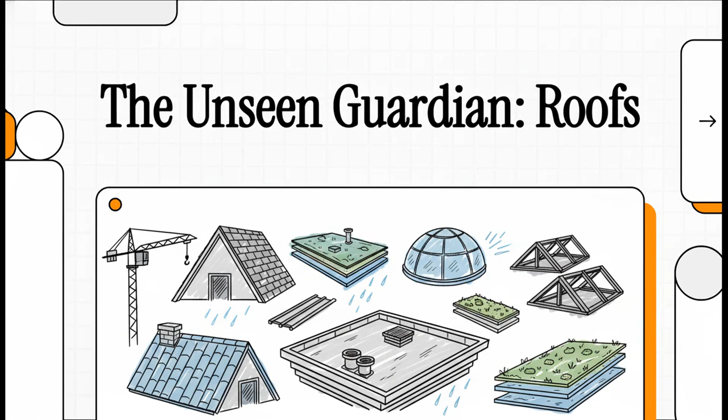We're going to look up way, way up. We're talking about that one part of a building we all just kind of assume will be there, but we literally couldn't live without: the roof. It's our silent protector, the crown on top of every building, and trust me, it's way more fascinating than you might think. All right, let's get into it.

So let me just ask you this, right off the bat. If you had to pick one single thing, what would you say is the most important part of a building? You might say the foundation, maybe the walls. Well, today we're making a really strong case for what's hanging out over your head.

I mean, think about it. A building without a roof isn't really a building at all, is it? It's just a box. The official definition says it's the uppermost part, designed to protect us from the weather. But that super simple definition hides a ton of incredible engineering and design. This thing isn't just a lid, it's a high-performance shield.

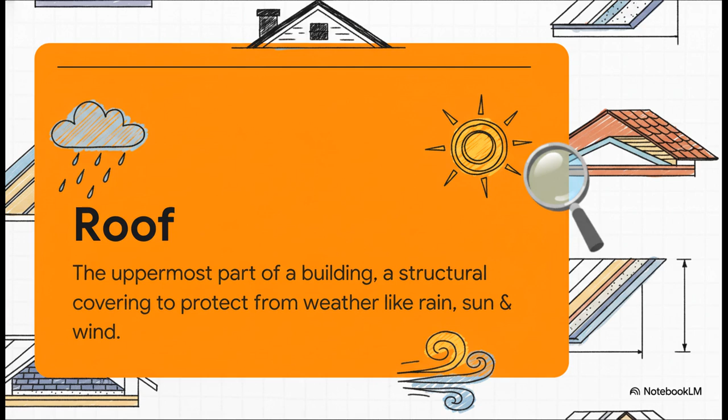Okay, so what does this shield actually have to do? Well, it turns out it has, count them, six essential jobs, and they go way beyond just keeping the rain from dripping on your head. Let's break down what it really takes to be a good roof.

Now, this is where it gets really interesting. First, a roof has to have the strength and the stability to hold itself up, but also the weight of heavy snow or someone walking on it. Of course, it's got to be waterproof, but that's useless without efficient drainage to get all that water off. Then you've got the invisible jobs: thermal insulation to keep you warm in the winter and cool in the summer, being fire resistant, and even blocking out sound.

It's a serious multitasker. So all those demanding jobs can actually be handled by roofs of all different shapes and sizes. And while you can find some pretty wild designs out there, most of them fall into one of four fundamental categories. These are the shapes that create those distinct architectural silhouettes we see everywhere. The two you're going to see the most are, without a doubt, pitched and flat roofs.

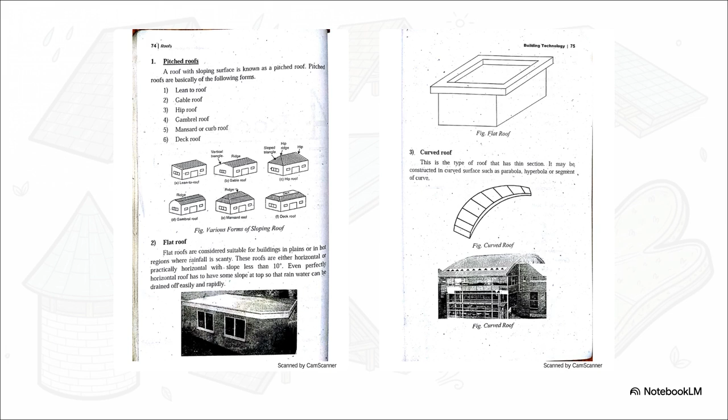The pitched or sloping roof is that classic triangle shape you probably drew on houses as a kid. It's fantastic for shedding rain and snow. Now, flat roofs, they're perfect for places where you don't get a ton of rain. But get this: despite the name, they aren't actually flat. They have a very slight slope, less than 10 degrees, just to make sure water can still find its way off.

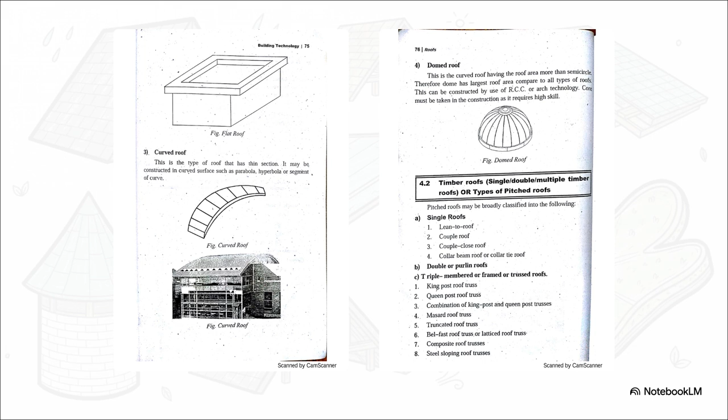Okay, so we've covered the outside shapes. Now, let's do the cool part. Let's peel back that outer layer and take a look at the structure holding it all up.

When we talk about pitched roofs, this internal frame is basically its skeleton. And the design of that skeleton changes completely depending on how wide of a space it needs to cover. Generally, pitched timber roofs are built in 3 main ways, and each one is a step up in complexity and strength. We start with the simplest form, called single roofs. Then, for bigger spaces, we add more support with what are called double or purlin roofs. And for the really big jobs, we bring in the big guns, the engineered powerhouse known as the trussed roof.

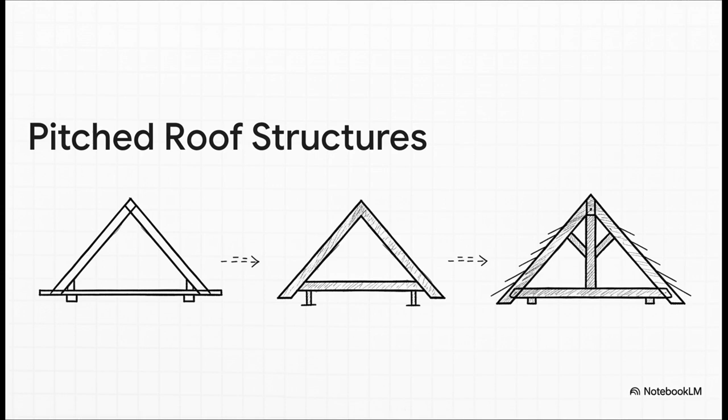Let's check them out. So what you're looking at here is a perfect example of a single roof. See those angled beams?

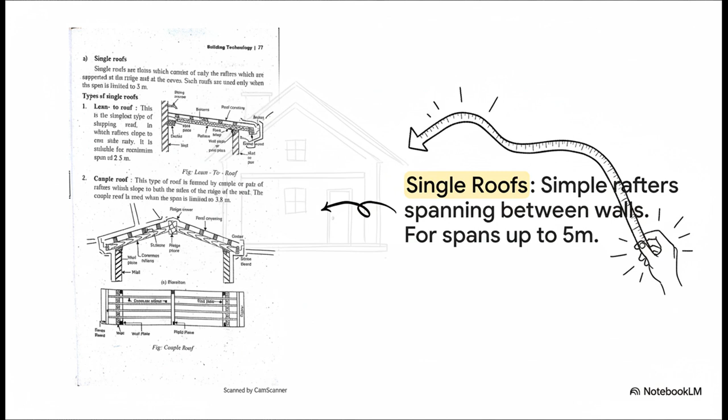Those are the rafters, and notice how they're only supported at the very top, that's the ridge, and at the very bottom on the walls. It's a really simple, clean design, great for smaller rooms, but it's pretty much limited to spans of about 5 meters, roughly 16 feet.

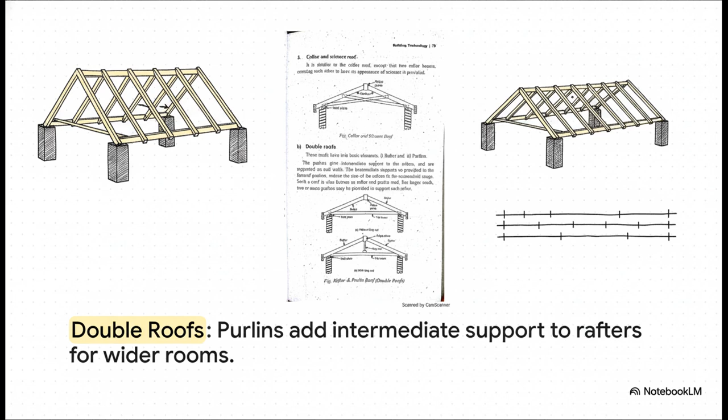So what happens when your room is wider than 16 feet? Well, you upgrade to a double roof. The game changer here is the addition of purlins, the horizontal beams running along the length of the roof. They give the rafters much-needed support in the middle, stopping them from sagging and letting you roof much wider spaces without breaking the bank.

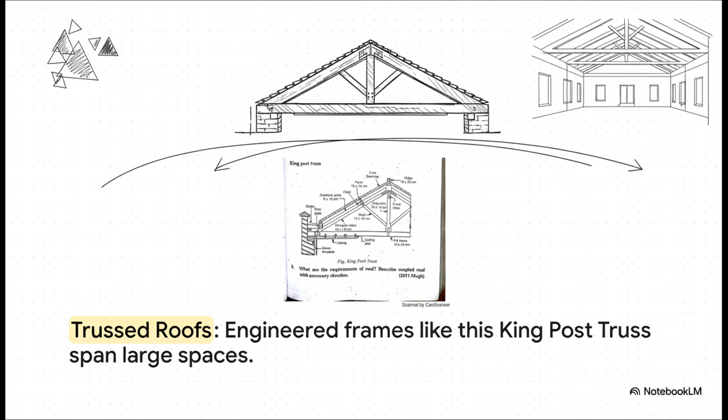All right, so we've built our skeleton, whether it's single, double, or trussed. Now it's time to put on the skin. The roof covering is the part we all actually see from the outside, and it's that final critical barrier against the elements. And wow, the choice of materials for that skin is huge.

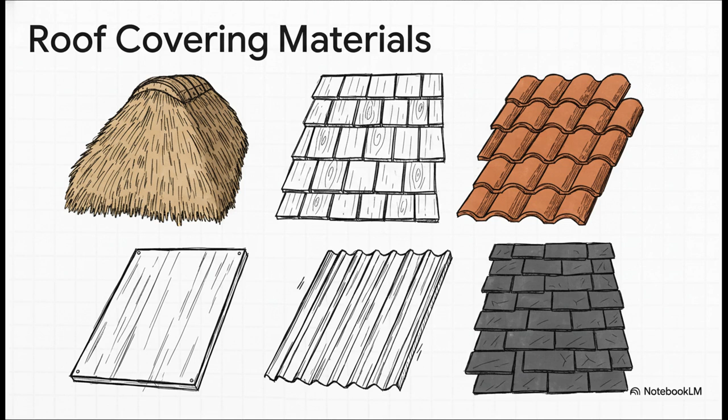You have everything from really traditional organic materials like thatch and wood, all the way to classic clay tiles. Then you've got more modern industrial stuff like asbestos cement and galvanized iron sheets. And at the top end, you've got beautiful natural stone like slate. This slide just perfectly shows the incredible range you're working with.

On one end of the spectrum, you've got thatch. It's cheap, it's light, you see it a lot in historic villages, but it's also highly flammable and soaks up water. Then, on the complete opposite end of that spectrum, you have slate. It's a gorgeous natural stone, it'll last forever, it's totally waterproof, but it's incredibly heavy and, you guessed it, one of the most expensive options you can choose.

Or take these two, for example. Tiles are one of the oldest and still most popular materials for houses, partly because they can literally be made from local earth. They give you that classic look and are just solid performers. But metal sheets, they're prized for totally different reasons. They're strong, they're tough, and they're lightweight. And that lightweight quality is a huge deal when you're trying to cover a massive factory roof without putting too much stress on those long-span trusses underneath.

So, as we've seen, every single roof is really a combination of two key things: an internal structure for all the support and an external covering for all the protection. It's this perfect marriage of form and function that really gives a building its final character. At the end of the day, it boils down to this simple but powerful idea: a roof is a complete system. You have the structural elements, the skeleton, and the roof coverings, the skin, and they absolutely have to work together perfectly to get the job done.

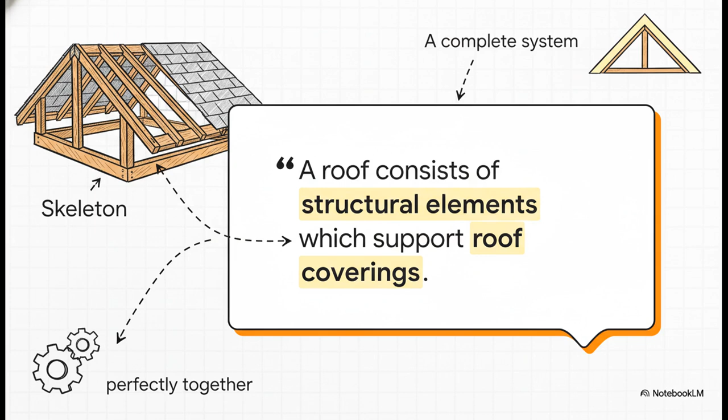So here's your homework. The next time you're out walking around, just look up. Seriously, try to identify the shapes, take a guess at what kind of skeleton is hiding underneath, and see if you can name the materials on the outside. You officially have all the knowledge you need to become a roof spotter.

And that brings us right to our final thought for today. A roof does so much more than just protect a building. It defines its whole character. It's like the final, most important brushstroke on a piece of architecture. So I want you to go take a look at your own roof. What does its shape, its material, and its style say about your home? And maybe, just maybe, what does it say about you?